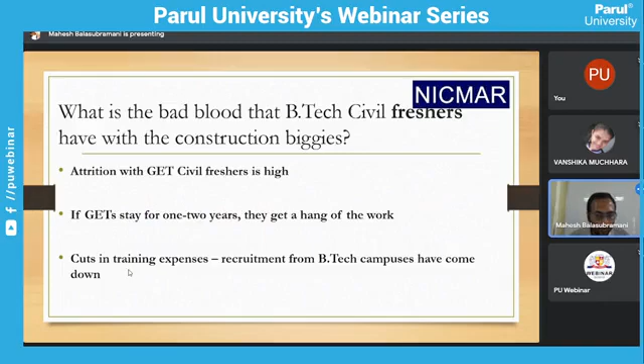So what do these companies want today? They absolutely want freshers, but these freshers should be knowledgeable about how the industry operates, and about recent advances in the industry in terms of materials, technology, and managerial techniques. They want candidates to understand their role in the industry and be cut out exclusively for it. For this, the companies don't want to make investments on you - they want you to make investments on yourself.

The situation today looks like this: if you want to become a geotechnical engineer or structural engineer, you need to do a master's in these disciplines. And today, if you want to survive and grow in the construction industry as a project manager or project director, postgraduation in construction management is becoming most necessary. We are conventional in thinking that roles in the industry are just a contractor's job or a GET's job, but today a lot of consulting related jobs and a variety of job profiles are available.

What are these kinds of profiles? Take the case of real estate companies - they want freshers to have an understanding of real estate development, real estate regulations, marketing and sales, and about property valuation and property economics as well. If you take risk advisory firms, they want you to understand risk management techniques and other project consulting techniques as well.

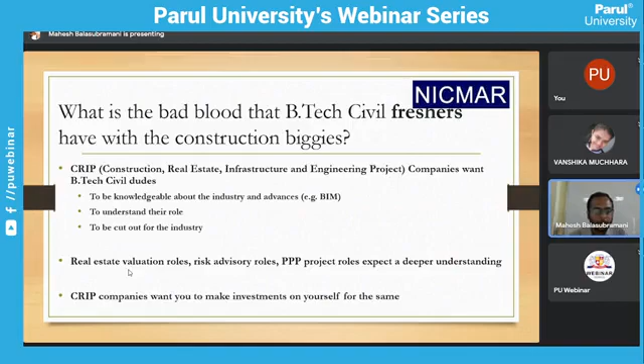This is the expectation of the industry - they want you to upgrade and upskill yourself in a lot of these areas and be ready for the industry. This is only possible through a postgraduation. We'll come back later - in the final 20 minutes, maybe we'll look at how NICMAR can help you in this.

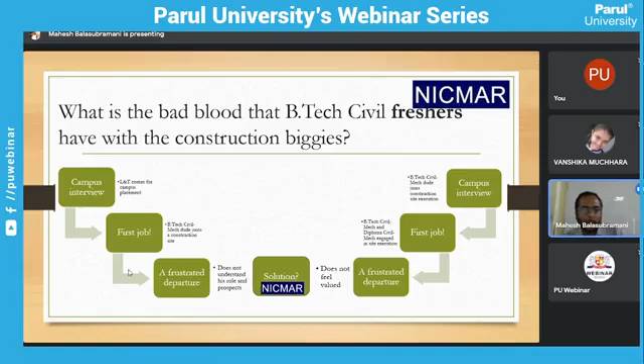But you all read Quora, right? Even in Quora, people say that with just a BE in civil engineering, you'll just get jobs related to quality checks, but you won't really become a project manager or project director. Your growth is very stunted if you just have a BE in civil engineering. So a postgraduation in civil engineering is becoming most necessary today, particularly a postgraduation in construction management.

The difference - what this postgraduation is going to do to your career is this: if you join as a GET to become a tier 1 managerial employee, it will take about 8 years, a minimum of 8 years, and mostly you will start out as a site execution engineer, and your starting pay is very limited.

But as a postgraduate in construction management, you will join as a senior engineer, and you won't have any probation. Within a span of just 3 years, you will enter this tier 1 managerial cadre. That means after your BE, including your master's study period of 2 years, you will be a manager in about 5 years - whereas in the case of joining as a GET, you will be a manager only in a span of 8 years.

As a postgraduate in construction management, companies like L&T offer this opportunity later on. Once you work for 3 years, they'll offer you the opportunity of doing an executive MBA at reputed institutions. Your promotion is fast tracked, and you'll be posted in departments like BIM, planning, costing, coordination, control, MIS, procurement, and strategic management, not in execution.

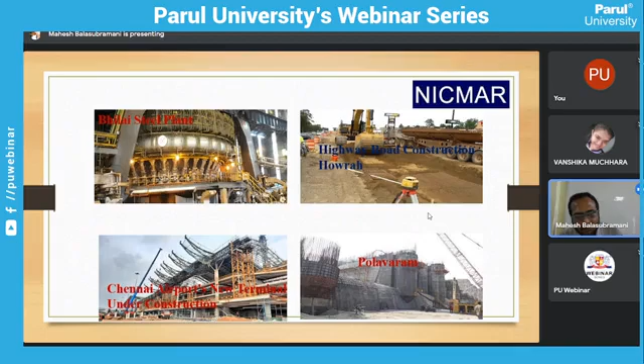When we speak about projects, we think it's only building projects or road projects, but it's beyond that. India is doing a lot of projects, and in all these you have an important role to play. India is doing a lot of steel plants, sintering plants and blast furnace plants. In all these, civil engineers have a huge opportunity, as well as road projects, airport projects, and a lot of renewable energy projects. Even in metals and minerals and mining areas, civil engineering candidates are required.

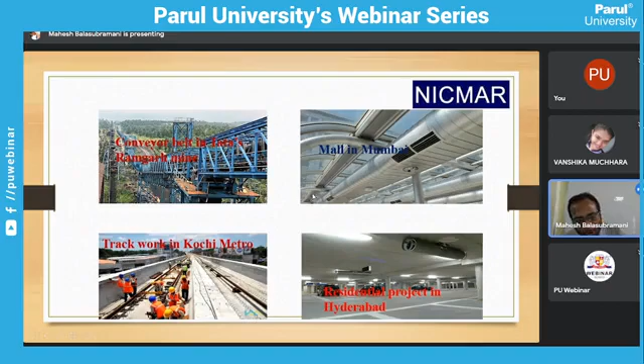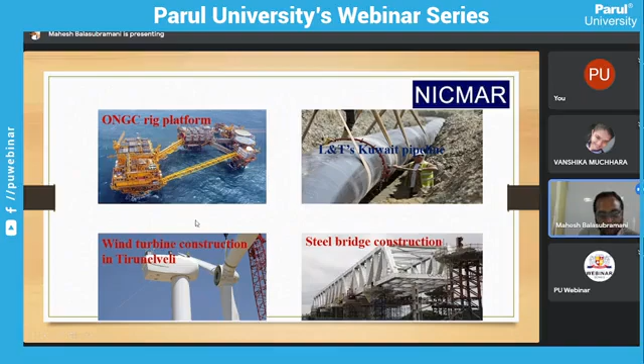Even in mall projects, metros, residential buildings, civil engineers are required. You are very well aware of this. Even in oil and gas industry, in upstream, downstream, pipelines and refineries, civil engineers are required in great numbers. And for renewable energy as well, for wind turbine and solar power construction, you are required.

Even within building services, for fire protection systems and plumbing systems, civil engineers are required. You must all be thinking that whatever you learned in fluid mechanics about pump selection is a waste, right? But this is the learning you will implement here. Whatever you've learned about pump selection, pump head and all these things, you'll be implementing here. You'll be responsible for design, construction and commissioning of the entire fire protection system and plumbing system.

Wherever construction is happening, to monitor civil works, to ensure and enforce safety in civil works, a civil engineer is required. So you also need to adorn the hat of a safety engineer. An electrical or mechanical engineer cannot monitor safety for civil works—a mechanical engineer can monitor safety only of mechanical works. So even the safety profiles, and even for preparing environmental management plans or environmental impact analysis reports, civil engineers are required.

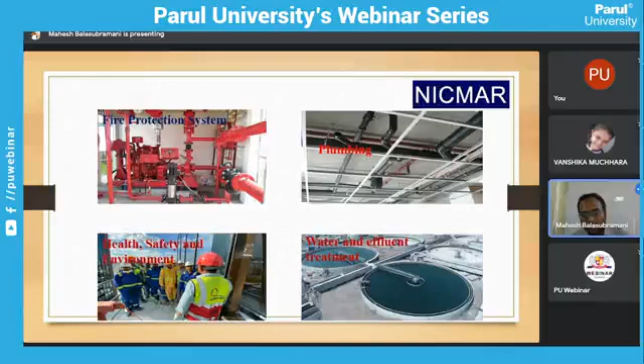For water and effluent treatment plants, civil engineers are again required. And for power plants, factory construction, petroleum complexes, civil engineers are required. So avenues are plenty, and it's not just during construction—even after construction is completed, civil engineers are required for facility management. As civil engineers, we derive joy in pushing the boundaries of what is the largest, longest, tallest and fastest infrastructure system.

About 15 or 20 years back, in all the cinema songs of our generation during our college days, we learned that the Empire State Building is the tallest building in the world. But today that benchmark has been bypassed several times, and today the tallest building in the world is something else.

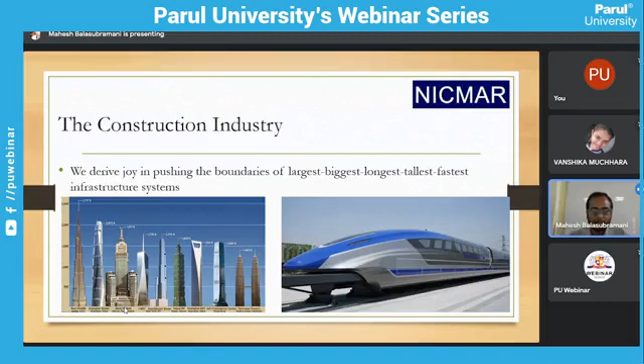Similarly, there is a huge race going on between nations on who is going to build the fastest train, and which country is going to set up or expand their high-speed rail network. In India, it's the Japanese system—the Shinkansen concept. In Malaysia and other countries, it's the Chinese bullet train concept. So there's a huge race going on to diffuse technologies in civil engineering from one country to another, and here as well you will see a lot of prospects.

In this industry today, we have two broad challenges, and these challenges are related to sustainability. You are very well aware of these challenges—today climate change is happening. So we need smarter material selection, smarter technology selection, so our technology should not use a lot of energy. And we need better managerial techniques for this.

In terms of scale and complexity, we need all these metros and infrastructure not tomorrow, but yesterday. So we are all making huge time overruns on these projects, and doing them at great delay—there needs to be a better way to handle this. In response to these sustainability-related challenges and complexity and scale-related challenges, there are advancements in construction materials, construction technology, and project management systems. All three of these things are interrelated—I can give you an example of how.

Take the case of building faster - we're going for precast construction or 3D printing. But not all kinds of materials are suitable for 3D printing or precast construction, so we need better materials suitable for these modern approaches. And to manage 3D printing or precast construction, we need suitable project management systems.

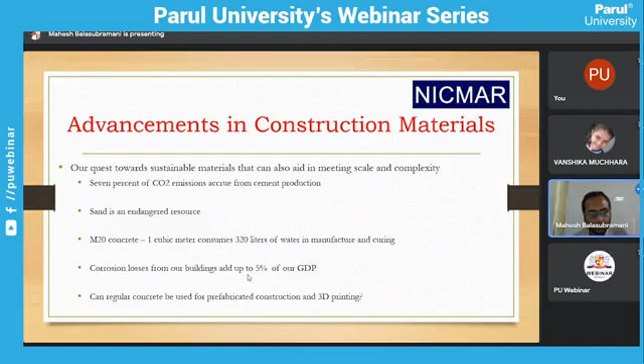How are we responding to these challenges? Here is where we have a lot of advancements in materials. I told that 7% of CO2 emissions come from cement production - to counter this, we are coming up with supplementary cementitious materials like LC3, which is limestone calcined clay cement.

This is a resource where you can read more about this material - the Indian government has heavily invested in it. Why this material is quite important today is because there is a 40% reduction in clinker constitution in the cement. In traditional Portland cement, it's about 80 to 90% clinker constitution, but here we bring it down to 50%. 30% is calcined clay, and 15% is raw limestone.

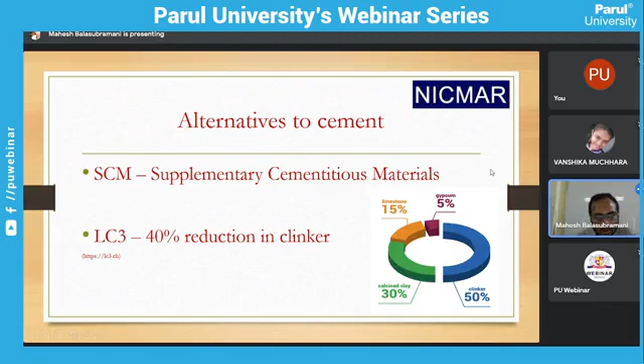5% is gypsum. And 15 to 25% substitution of cement we are trying to achieve through use of fly ash, silica fume. There's a lot of Indian research on use of rice husk ash and sugarcane bagasse ash, because these materials are available plenty in our country.

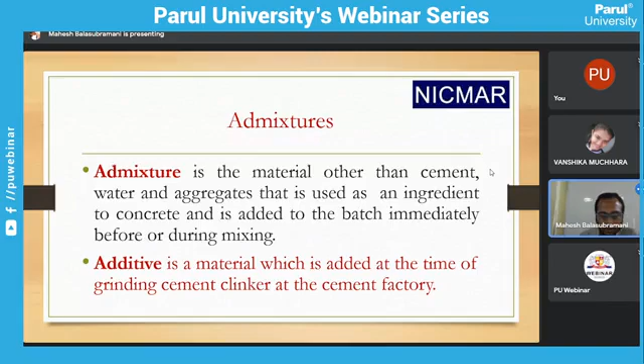We're also using a lot of admixtures and additives today, and this is something you need to know for your interviews as well. Additive is a material added during grinding of cement clinker at the factory, whereas admixture is added during the batching of concrete. There are chemical admixtures and mineral admixtures today.

In admixtures, you have plasticizers to increase workability of concrete, and you have retarders. In very hot climates, to increase the setting time, we use retarders. In very cold climates, to reduce the setting time, we use accelerators. We use air entraining admixtures to improve mechanical strength of concrete, and anti-washout admixtures for underwater usage, bonding admixtures for rehab projects.

I mentioned that 5% of GDP is lost because of corrosion in buildings. So we are trying to address that by using corrosion inhibiting admixtures today.

There are other better alternatives to sand coming up in our country. Our annual requirement of sand is 1.5 billion metric tons, so here is where we're trying to use copper slag, granulated blast furnace slag, bottom ash, or quarry dust.

One area we have not quite explored very well is the use of construction and demolition waste. Research says India produces about 421 million tons of construction and demolition waste every year, and if you recycle and reclaim from this, a possibility is that you could get 30% yield as aggregates.

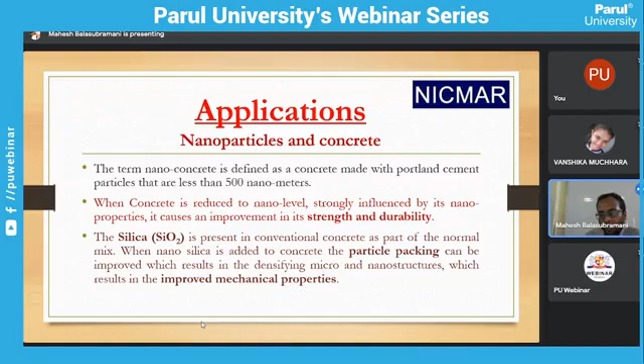Then there are other advancements in construction technology, and nanotechnology related advancements are aplenty today. Most of these nanoparticles like nano alumina and nano silica function to improve the hydration of cement particles. Nano silica particularly gives better particle packing capabilities and improved mechanical properties, and it imparts better strength and durability to the concrete.

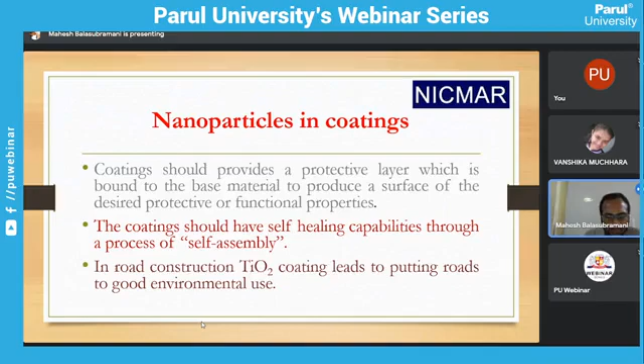And to improve fatigue resistance as well, we use copper nanoparticles, and we use nano titanium, which gives a self-healing capability in CC roads. Even if some slight damage is imposed, it kind of heals itself. And for fire resistance of steel structures, we are again using nanoparticles.

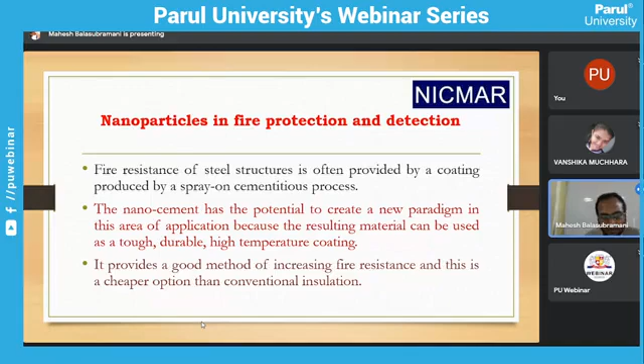3D printing is nothing but this additive manufacturing concept, where you deposit layer by layer. And the requirement here is that you can't do compaction, so this concrete should have self-compacting capabilities.

Another advantage with precast construction is the rapidness with which you can do the construction. There's going to be plenty of water savings as well - we discussed about water consumption per cubic meter of concrete.

But there are other challenges related to precast construction. For instance, for this solution to work, you need to have a lot of these precast sites clustered around the precast plant. Only then this plant becomes more viable - without demand, this plant is not viable. And why there cannot be enough demand, the reason lies in the design aspects.

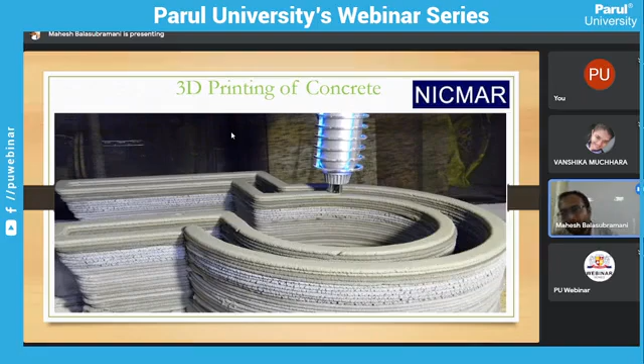This is going to be the future in construction, using a combination of in situ, precast, and 3D printing techniques. So here are some images of 3D printing in construction.

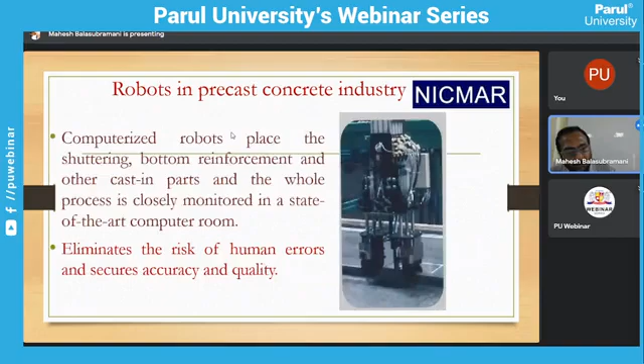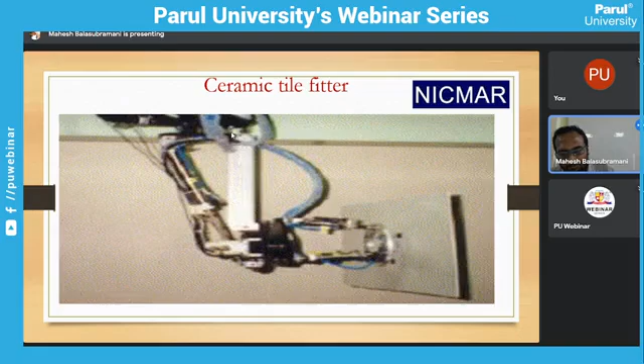Another important advancement is in construction robotics and building automation. The construction industry is heavily labor intensive, and we cannot achieve automation per se, but we can achieve certain levels of mechanization. Today we are trying to use robots for shuttering, for bar bending, for concrete placement, for road construction, and even for finishing activities like tiling, painting, and floor finishing.

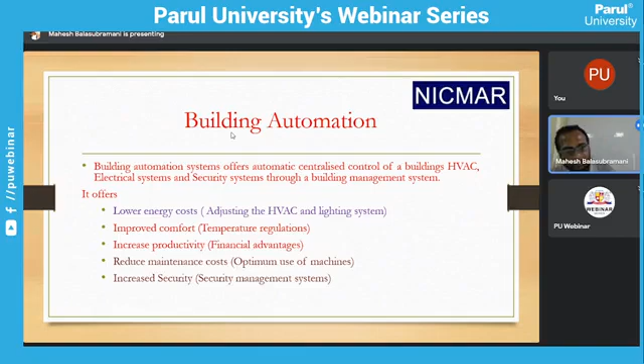When you speak about automation, it's possible to a certain extent in operations and maintenance. Say you have a huge office floor and want to automate how the air conditioning and lighting operate. You can divide the entire floor into various zones, and with motion sensors and occupancy sensors, target your HVAC and lighting attention. This gives better comfort, increased productivity, and reduced maintenance costs.

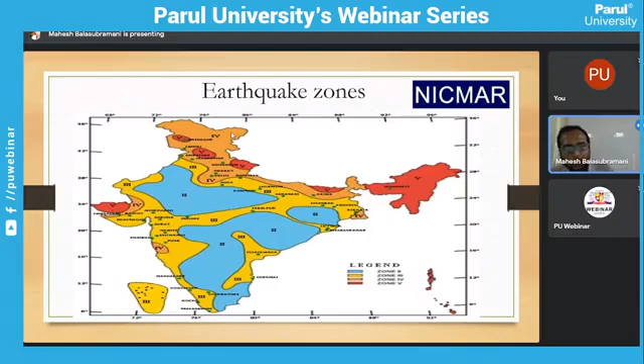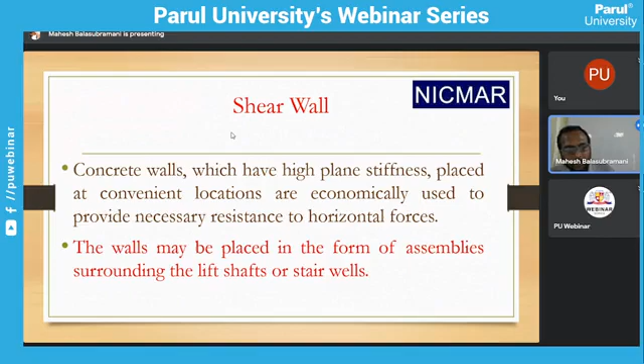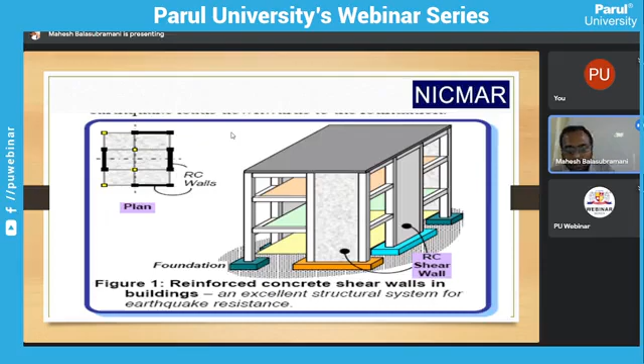Another advancement in construction technology is shear walled buildings. This concept involves concrete walls with high in-plane stiffness, which provide necessary ductility and resistance to horizontal forces. Research says these shear walled buildings can withstand an earthquake on the Richter scale up to 8, and even beyond. These buildings give enough time for occupants to vacate before the building collapses.

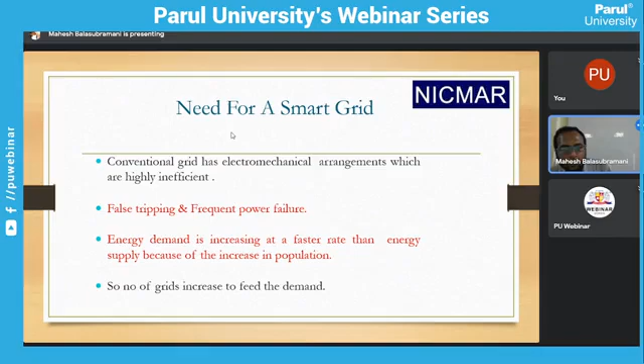There are other advancements in electrical and mechanical aspects of projects as well. For instance, in electrical aspects, we have smart grids with smarter cables. Normally if a cable gets cut, the power gets cut, but today we have self-healing cables, so even if these cables are damaged, they will heal themselves.

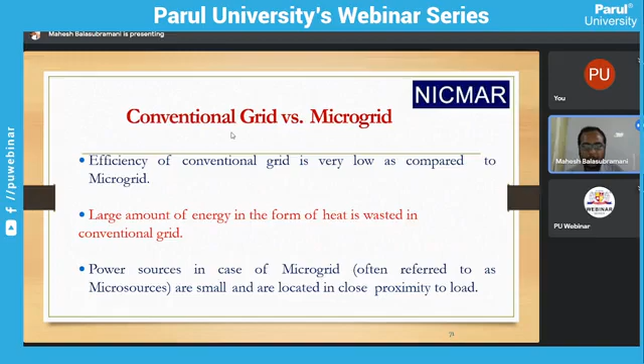Some advantages we have with smart grids and microgrids. Today power is produced in a decentralized way. On top of your roof, you can set up solar power plants or wind turbines, so power may be available at a surplus in each of these houses. To capitalize on this, we are trying out microgrids, where at a local level you can tap the surplus power available. Compared to the national grid, which emits a lot of heat and wastes energy through transmission losses, the losses are minimal with this microgrid concept.

In terms of mechanical aspects, you know there are electric cars and autonomous cars today, and similarly in construction machinery we have electric machinery, and now we are researching autonomous construction machinery. You know backhoe loaders, JCBs, and excavators are there. So we are trying out electrical autonomous JCBs that can work in tandem with each other, interconnected autonomous JCBs. That's what's going on in equipment-related research.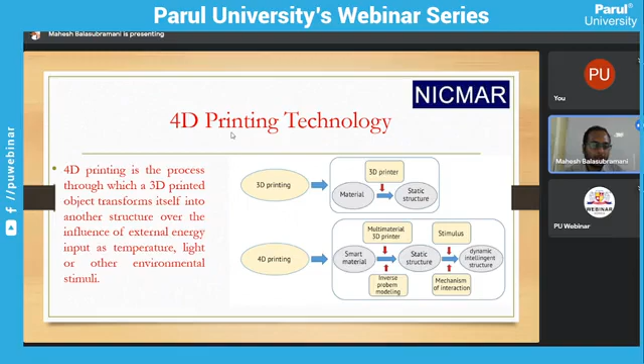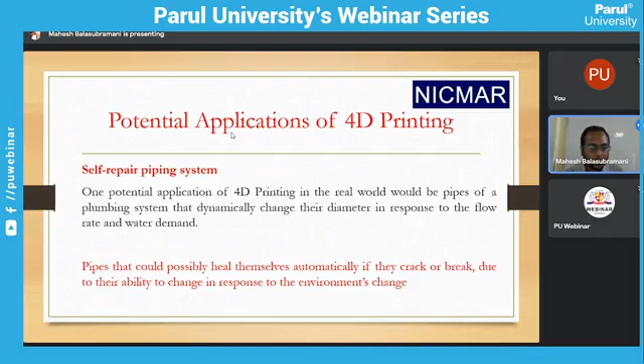Another important advancement is the development of smart materials in mechanical aspects. We spoke about smart tools and electrical aspects; in mechanical aspects, today there are smarter pipes that will heal themselves if damage is inflicted upon them. These are self-repair piping systems important for process plants and other critical applications.

Today we are also having IoT. This terminology is used for granted, and several people use this term, but this technology has been used in the construction industry in the truest sense in the Nagpur metro. How they used IoT is to implement a 6D BIM system.

When you speak about BIM, you know about Revit—it's only a 3D model, right? In the Nagpur metro, they attached the schedule to the 3D model, so it became 4D BIM. They attached the cost to it, making it 5D BIM, and they also attached O&M to the 5D model, which became 6D BIM.

How they attached O&M to this 5D or 3D model is that they had sensors and actuators. Say you have a column or beam, you attach sensors to these columns or beams, and take signals from these sensors through the building management system, which is in turn connected to your ERP and Revit. It constantly gives stress and strain readings from this column or beam.

If the beam is going to fail, this will automatically give an alert in the 3D model saying this component is going to fail, and it will automatically create an alert or job card for the O&M team. This can be extended not only to civil structures but also to other MEP components like CCTV cameras and air conditioners. When these components fail, you'll automatically be notified in the system at the 3D level. That's what they achieved using IoT.

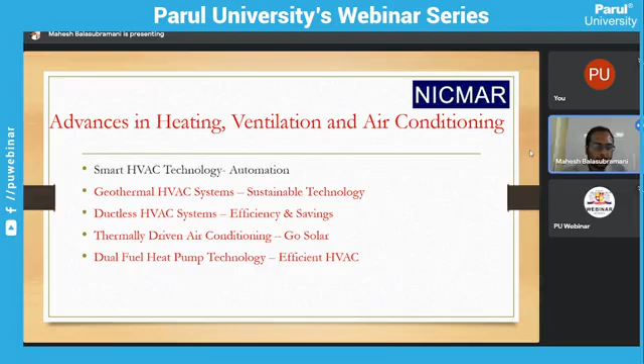Other advancements in mechanical aspects include ductless HVAC systems, where you pass tubes of water to achieve cooling—this is called radiative cooling, just like how a car radiator works, acting as a jacket around your engine. A similar concept is used here.

In terms of safety, we are also trying to use IoT. We give wearable devices like smart watches to construction workers and always monitor their vitals—whether they are falling down, whether their pulse is very low, and whether they are working in a very hazardous environment. If their pulse is very low, the command center will automatically stop the worker from working, since a lot of accidents occur when workers work under such health conditions. Sensors are also attached to workers' clothing and hard hats, so if they're working in a hazardous environment and get hit with something, the command center will immediately know and can take action.

Now we'll come to advancements in project management techniques.

We spoke about advancements in materials and technology so far. The third advancement is in the form of better managerial techniques.

Today we are doing a lot of things offsite, with better techniques, trying to adopt manufacturing-based approaches in construction. So the way we plan, monitor, and control projects also needs to change. That's where we are trying to implement lean project management systems in construction as well.

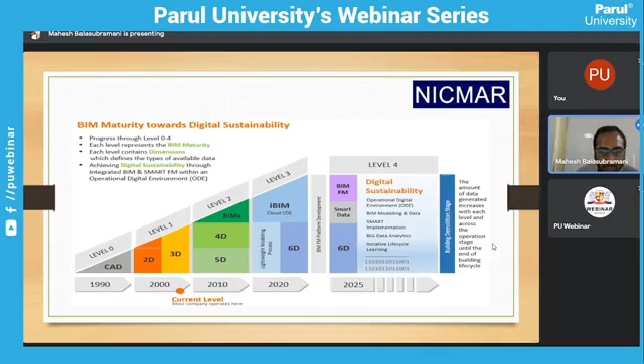That's what we have learned so far. But companies like L&T are doing 4D and 5D modeling. When you attach the schedule to the 3D model, it becomes a 4D model, so you can simulate the entire progress and make interventions. If you attach the cost as well, it becomes a 5D model. If you attach the O&M as well, it becomes a 6D model. Today we are also looking at 7D models, which will later incorporate sustainability and other aspects. This is the advancement related to BIM.

Now the question is, if I need to join the construction industry, I need to upskill myself in all these areas - materials, project management techniques and technology. And after all this effort, your question can be, will the industry pay you very well?

I'll give you an example from my work experience. In 2012, my gross monthly salary was about 25,000. In just a span of 2 years, my gross salary became about 3 times. This is the kind of hike that the construction industry gives. You won't receive such hikes in IT at all.

Maybe in IT they give you this hike upfront, but in construction, only if the company knows that you're going to stay will they give you this hike. So in the IT industry, the higher package is given upfront, and later on within the same company, the hike is very, very limited.

This is what people don't know about the construction industry. And this was about 2012 to 2014. Today the starting package for postgraduates in construction management is 6.5 lakhs per annum. And think about the hike that you will get in a span of about 2 to 3 years.

Normally people don't speak about other benefits that come with the job. Your bachelor accommodation or family accommodation is completely borne by the industry, which is a phenomenal cost. No other industry offers this kind of benefit. Construction companies normally provide a very comprehensive insurance package, and all these things are not a part of your pay package at all.